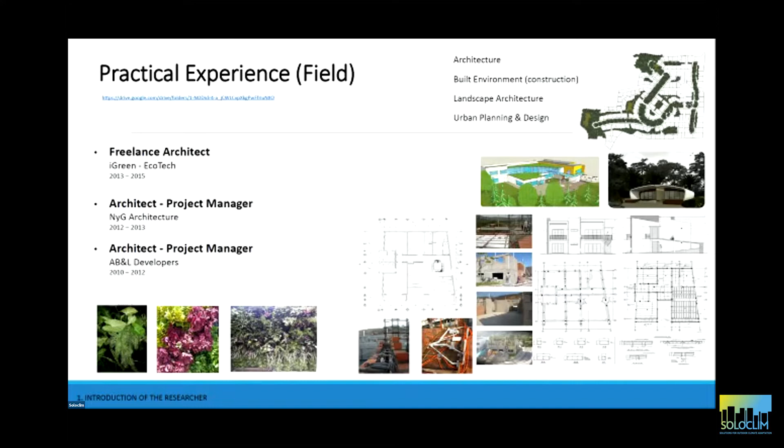So without further delay, I would like to mention the Soloclim supervisory team. For Arcadis it is Marian, Verali, and Luke. Meanwhile, for Politecnico di Milano, we have Valentina, Eugenio, and Matteo. A little bit about my background in architecture. I studied architecture as a bachelor and have some 5 years experience in the built environment and landscape architecture, but as well a good balance with the academic side. Without further ado, let's proceed with the research topic.

So, water-based solutions and urban climates. My research reviews and tests evaporative cooling principles and techniques applied to outdoor elements, spaces, and surfaces, focusing on designing innovative cooling prototypes using water to reduce peak temperatures during extreme events, in this case heat waves, in urban areas, improving the thermal comfort of citizens. And here I show a couple of images, but we will talk further about it.

Why use water? This is one of the big questions. So I can immediately tell you as a starting point some of the key advantages of using water for reducing temperature in urban areas. It can significantly reduce the air temperature. It has very low economic costs, as it's a natural process, done by nature, and it has a high thermal comfort and psychological perception.

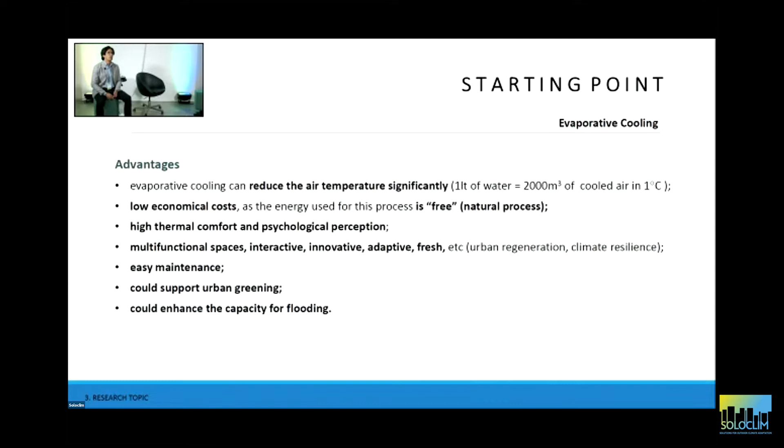But it can also support multifunctional spaces. They can become interactive, innovative, adaptive, fresh, in support of urban regeneration and climate resilience. It has easy maintenance, and it can as well support urban greening and enhance the capacity for flooding.

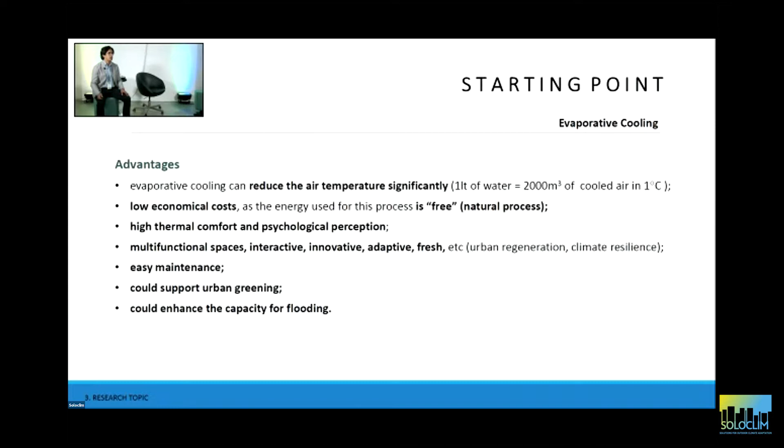It has, of course, conditions to successfully occur, related mostly to the natural environment and the microclimate, like the relative humidity, but of course as well the surface area to volume ratio. That means the smaller the particle of water, the quicker it evaporates if the climatic conditions are correct or ideal.

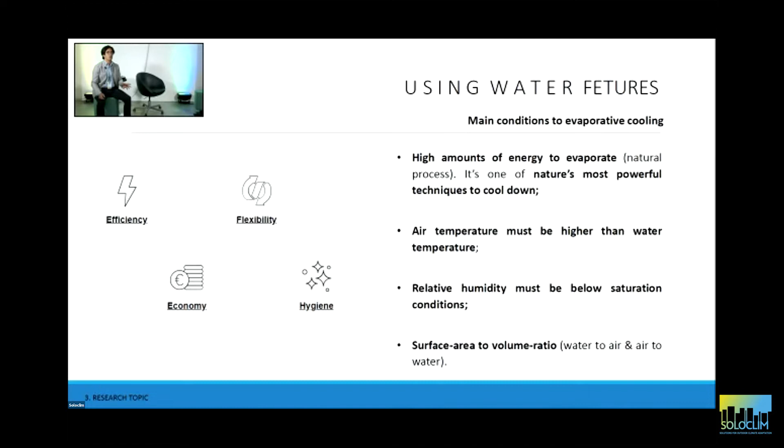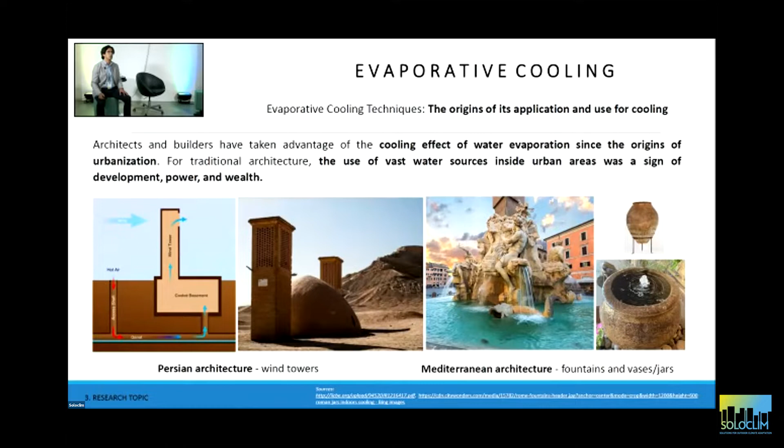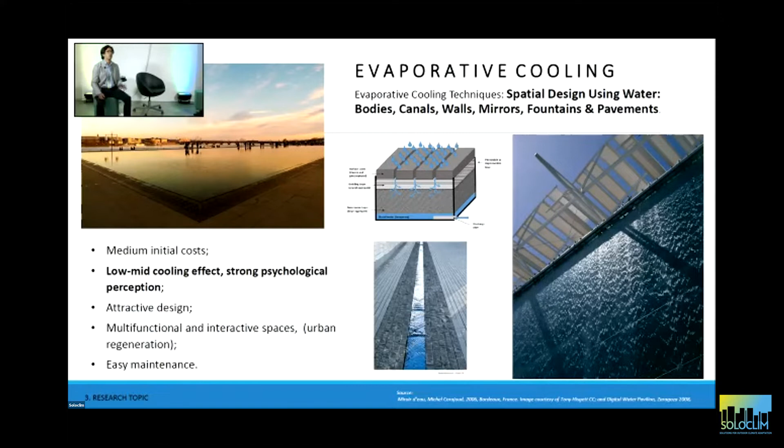So I started my research by going to the past, to the origins of the application of evaporative cooling. I studied different cultures like Persian architecture and Mediterranean architecture, and I went deep into research on what has been done in the past. Then I started working towards what has been done in the present and in the last years. I made a quick selection and categorization by cooling effects. So I present here some low and mid cooling effects with water cascades, fountains, mirrors, and so on.

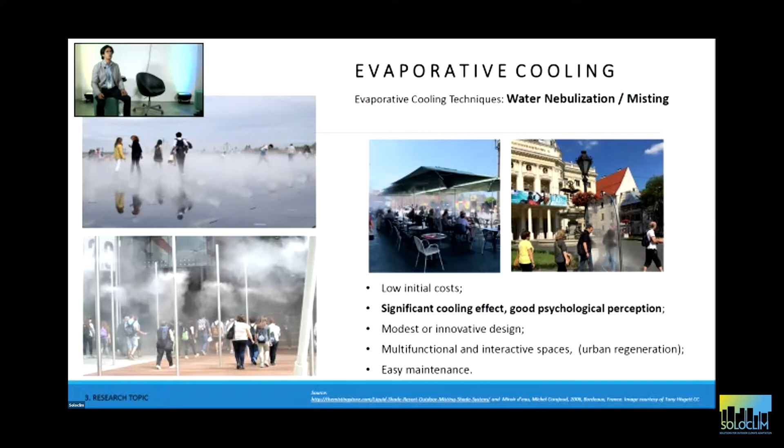Another one that has a significant cooling effect is water nebulization or misting. It's due to the area to volume ratio again. With the micronization of water into small particles, it is easier to evaporate, so this has a higher effect. When the water evaporates, it absorbs the heat in the air surrounding it.

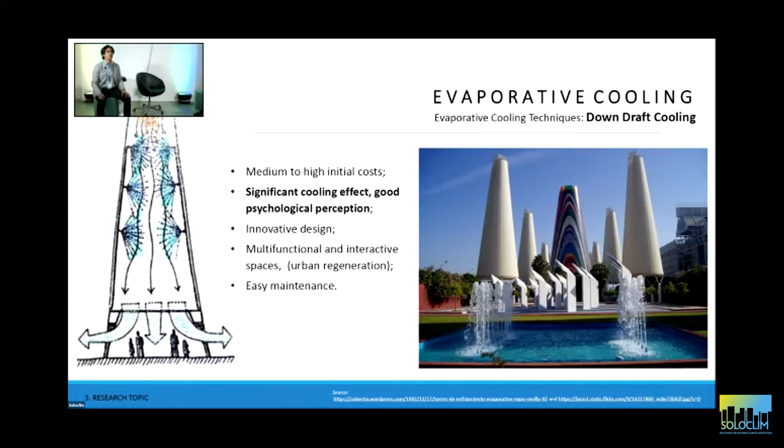An interesting technique around this one is called downdraft cooling, and it's pretty much misting on top of columns that are surrounded or confined, creating a cooling current going down below, because the effect of hot and cool air is just a natural process.

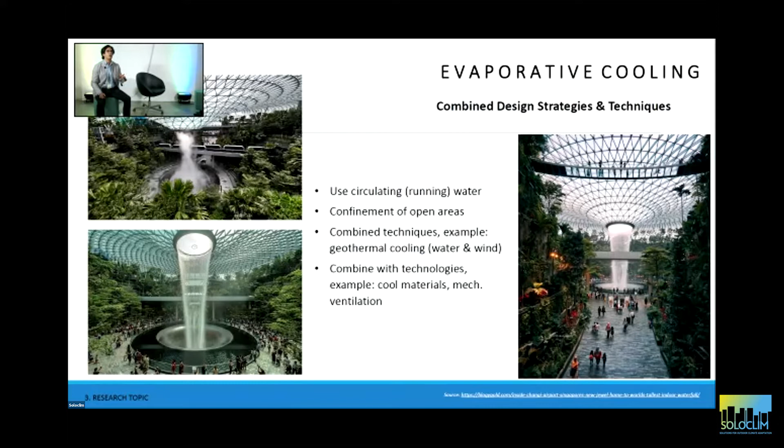And at the end as well, I put it together with combined solutions where you have different elements like nature and water, evaporation of water, and then you can have a microclimate, very confined, very strategic. But as well, it has disadvantages, and I found already for the prototyping some limitations.

So of course, if humidity is above a certain percentage, humidity saturation, then evaporation processes are reduced, and it is less comfortable for people around it. And some of the limitations for the prototypes is that it can dissipate in urban spaces, so outdoor areas. So it needs confinement. This has been a great discussion among my supervisors and my colleagues. Of course, it uses water, and we are in an area of water stress as well. So this is a topic to talk about.

Meanwhile, proliferation of harmful agents like Legionella is possible, so it needs to be filtrated in case. And of course, it needs some infrastructure change. You need to be spending some money. But let's talk about designing the prototype.

So during the studies and during all the research I've performed until now, I separated the principles that are most interesting. And I have found that, for example, heat dissipation in buildings, when the buildings are having these wind flows and it's knocking on buildings and it's going in different directions, this could be used, and I will show you later on. But geothermal is another, from the Persians as well. They used it in the past. It's very interesting how cooling air is possible over there.

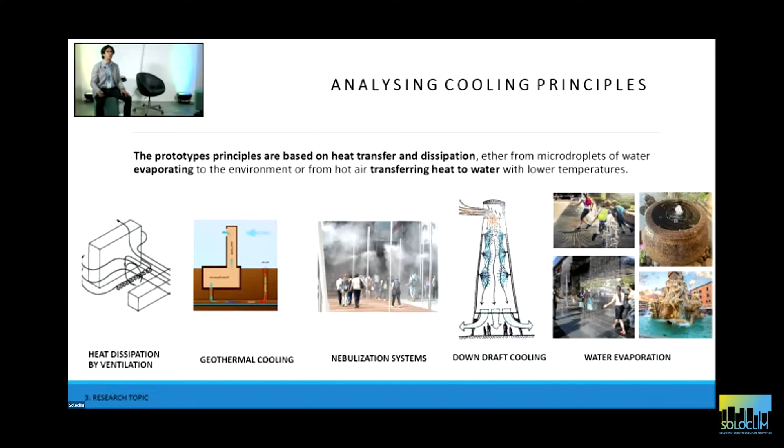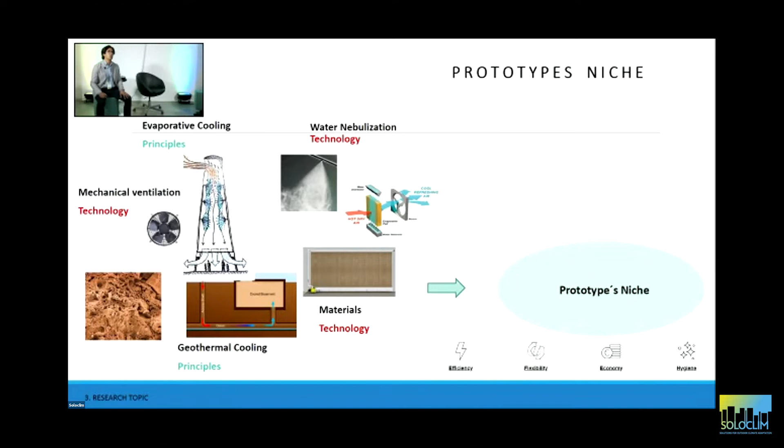Of course, nebulization, downdraft cooling we spoke of, and water evaporation, as Romans did with their fountains and with their jars, and as architects are doing now. And then we find the techniques that are just spatial planning and design by architects, and different strategies. Okay, well, let's say prototyping for the niche. I combine these principles and these techniques, I put them together with different materials, and I find a niche.

And then what I do is I have three steps. The first step is identify the hotspots, data-driven spatial analysis, I call it. The second point is prototyping the solution. And the third point is the research through design approach. This creates the analysis, comparison, and retrofitting of proposals. The first point entails finding the location.

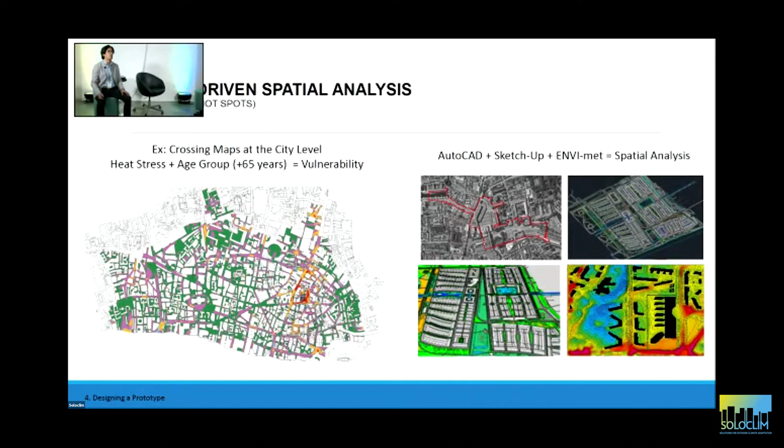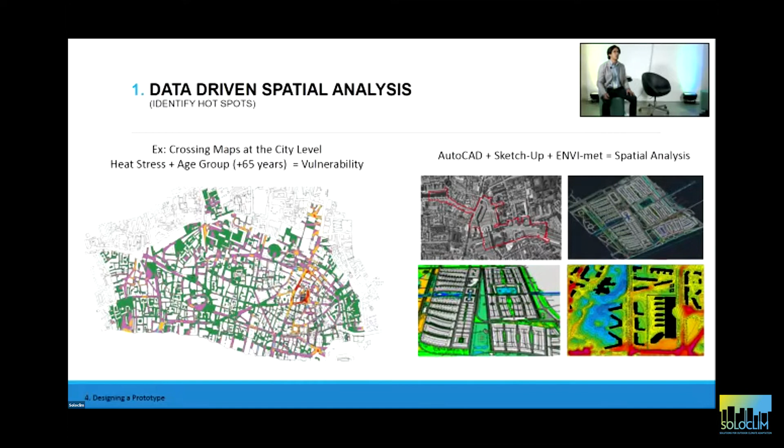For this, I have been using GIS, so mapping where the heat is, but not only the heat stress in the city. I also use age vulnerability, as people over 65 are more vulnerable. And then with different software, AutoCAD, SketchUp, ENVI-met, and now Lumion, I start doing the analysis. So it's very located. That's why I call it data-driven. Prototyping the solutions in certain areas already selected.

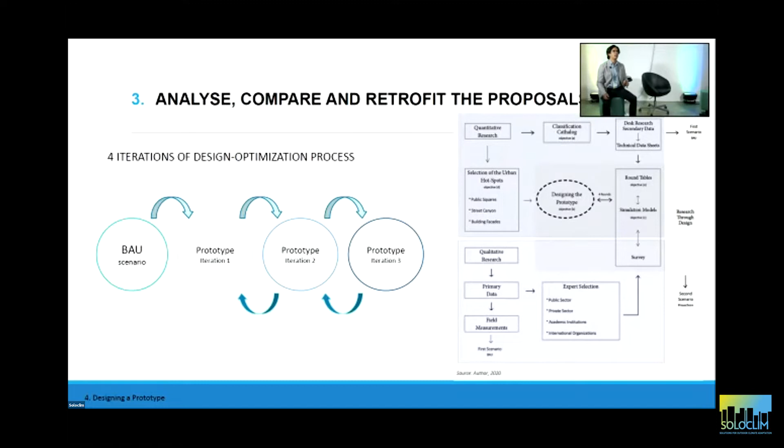And then I go through the research through design approach, entailing a qualitative and quantitative approach, where I talk to experts and retrofit the analysis. Some of the areas for designing are the response to climate change, the thermal comfort and cost, and so on. But I want to jump directly to the prototypes. I will be showing you two types of prototypes, facade and ground prototypes.

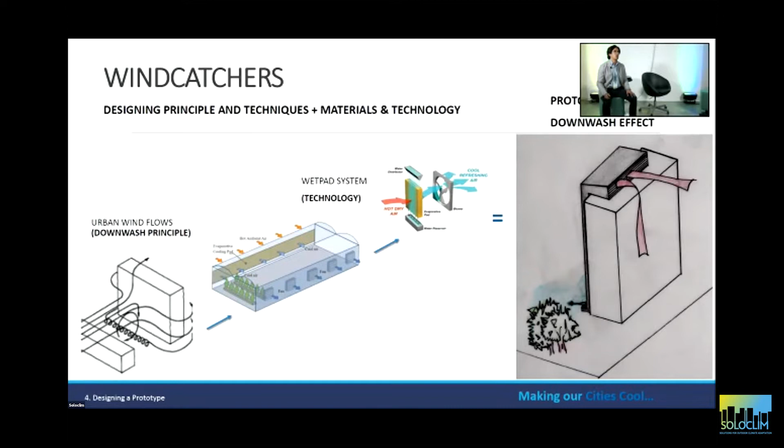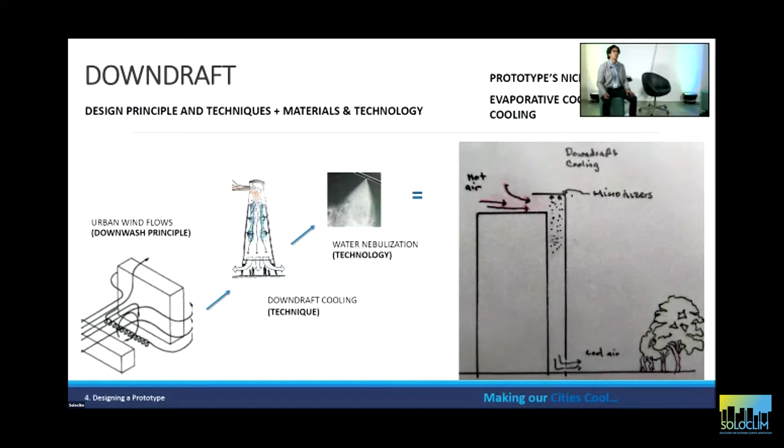The wind catchers start with the downwash principle, when buildings get this energy from the wind, together with a different material and technology, and we can have a first draft of my prototype on the sides as well. If you combine it as well with nebulization on top, then you can get the downdraft effect if you have confinement. And I would like to show my first prototype.

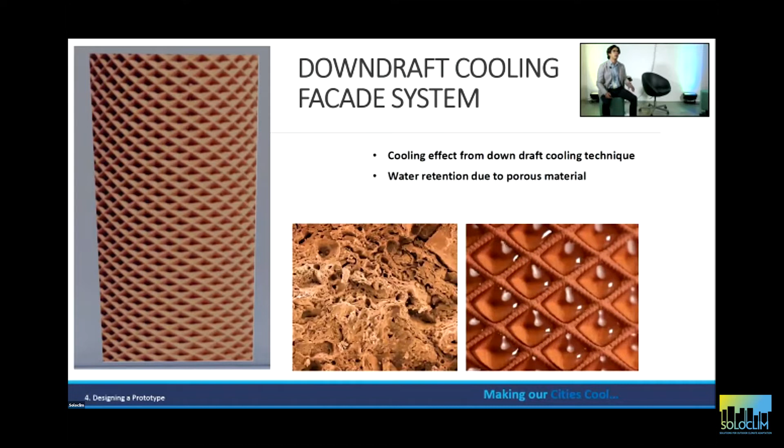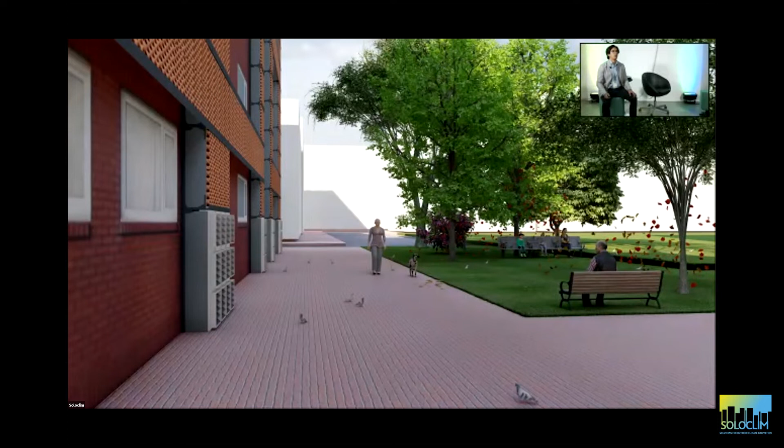This is one of the materials I'm using, very porous, this kind of baked material that can support water, it can have some cooling effect by the downdraft effect, and it's very porous. And if you put it in a render, there's a panel of 120 by 60, and it can be built as a second facade, supporting as well solar radiation for the second building, and giving some outdoor space some cooling effect. So here is where the wind is caught as well.

And here's an image of the structure and an image of the water micronizing inside as well. So this is how the panels are working, fixed and being irrigated. The second prototype that I'm going to be talking about is geothermal. And this geothermal is consistent with the Roman jars as well.

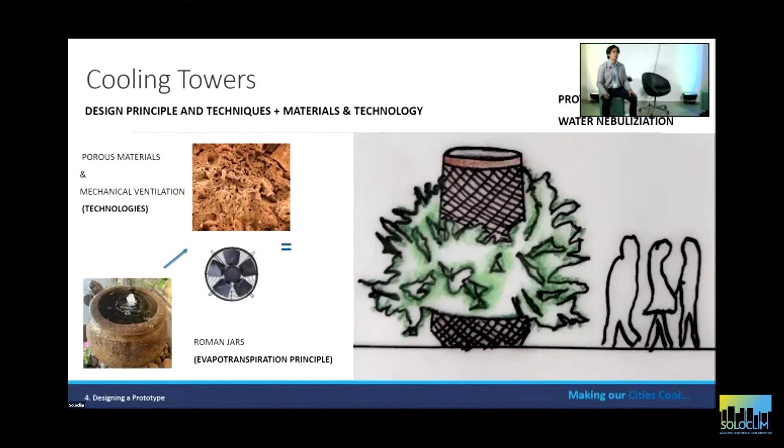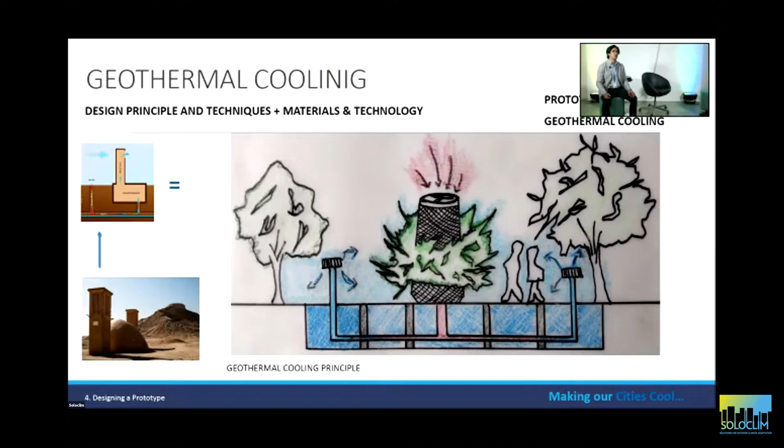Same materials and some ventilation that can be used with some geothermal, so where the air goes inside the jar by mechanical ventilation, passes through water, creates heat exchange, and is expelled in certain areas. And these are the first intentions of drawings and draft drawings of the prototype. And then I present here a

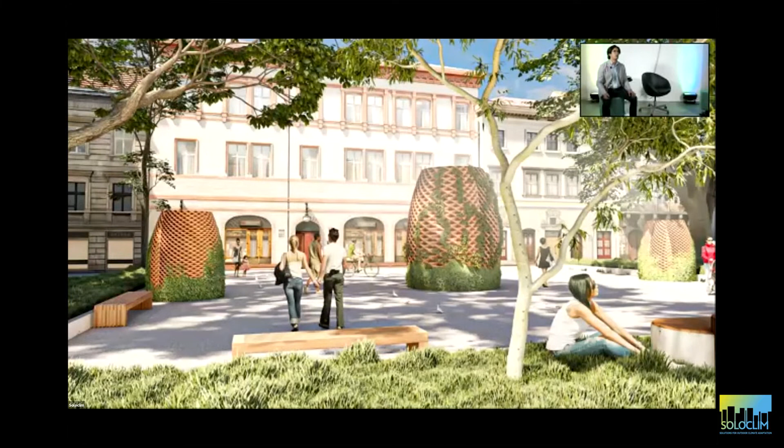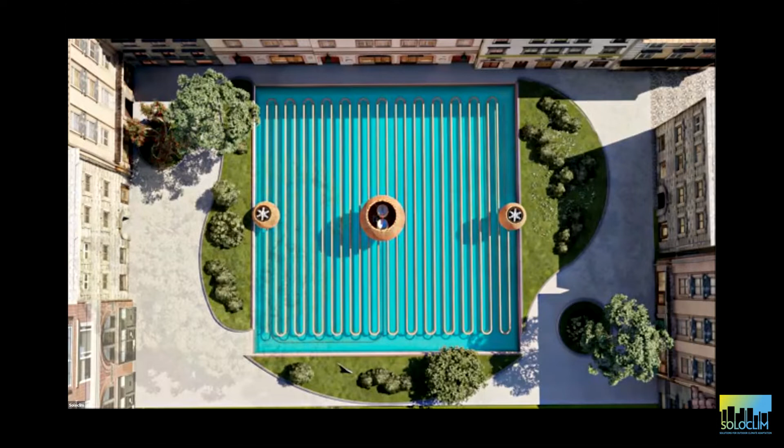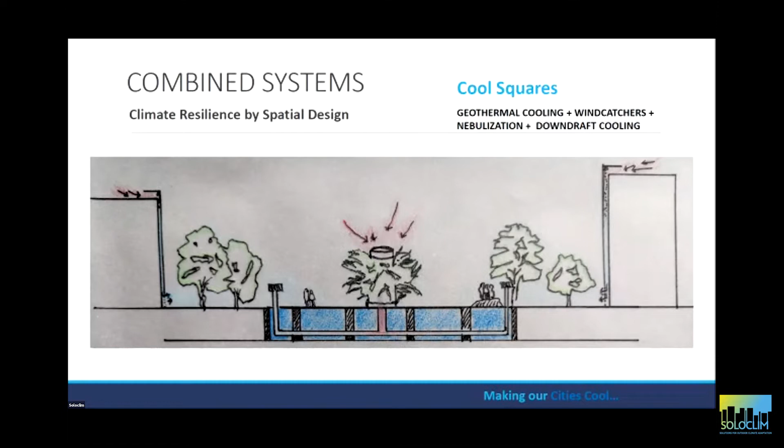render of how it could be looking, same materials, some plants growing in it, and the water is below, creating the cooling effect. This is how the water could be looking, so it supports as well the flooding capacity of the area. And as a final image, the combination of both prototypes creates what I call the cool squares, where we can have an area where it's cooled and supporting against the heat island effect phenomenon.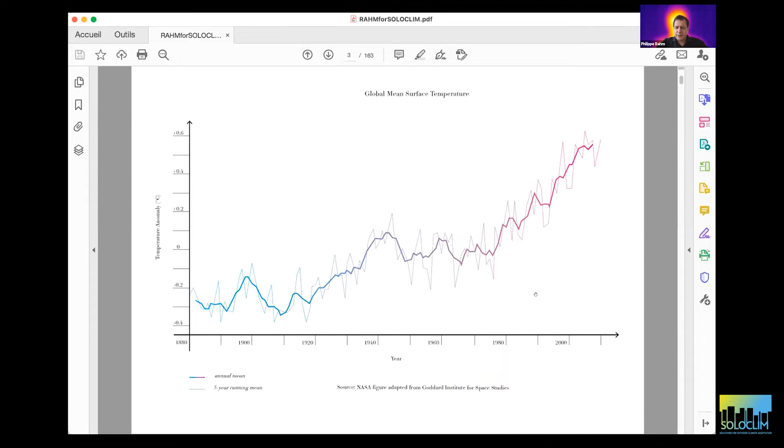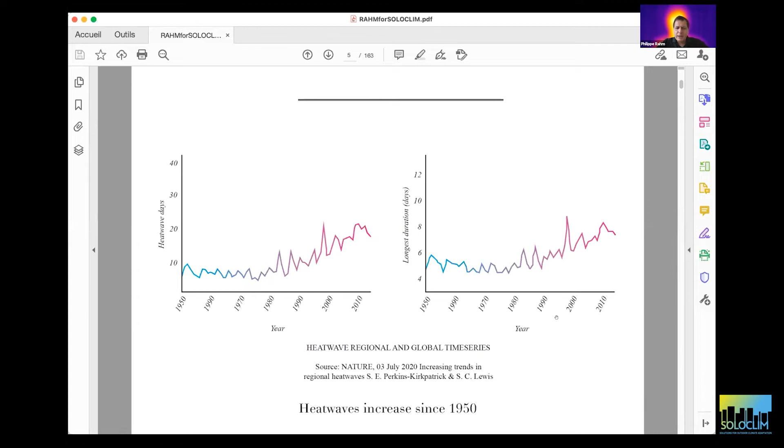So first, this is what's happening today with global warming, and this is the consequence of that. With these different scenarios, it can grow more than maybe 6 degrees. So the city will become more and more hot. We can see also here the increase of heat waves since 1950. And of course, the heat waves are linked to what happens in the city with what we call the urban heat island.

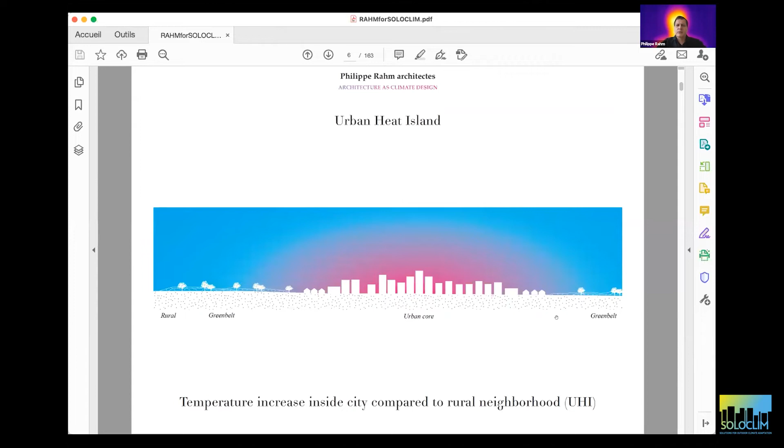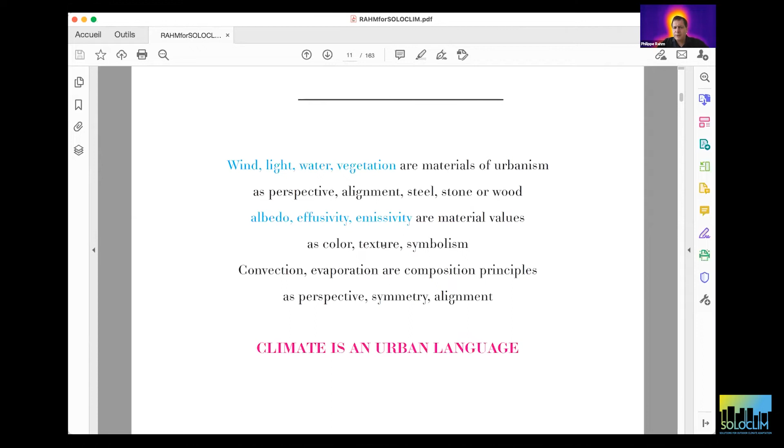And so if we want to do that, we have to use some tools, like wind, light, water, vegetation, or albedo, effusivity, emissivity, or evaporation as a principle of composition. So this is what I'm doing in my office, in my urban projects. I use these kinds of phenomena to do the design. So now I want to give some examples of that.

So the first one is a competition we won in 2019 with OMA and Laboratorio Permanente in Milan, Italy. This is about two sites. One is 44 hectares, called Farini, and another is 15 hectares. And we have to do a new part of the city because it was all abandoned land from the railway company, and so it's empty today. And so we have to think about the future of that.

And when you are designing a city, you think about the public space and the private space. So the public space can be a plaza, it can be the street or boulevard, or it can be a park. And so here we say, okay, the public space should have a kind of environmental issue.

It should respond to something. And so we decide, for Farini, to create a cooling effect for the city and for the people living there. And for San Cristoforo, we decide to do a cleaning effect for the underground water. So it was like to clean the air for Farini and to clean the water for San Cristoforo.

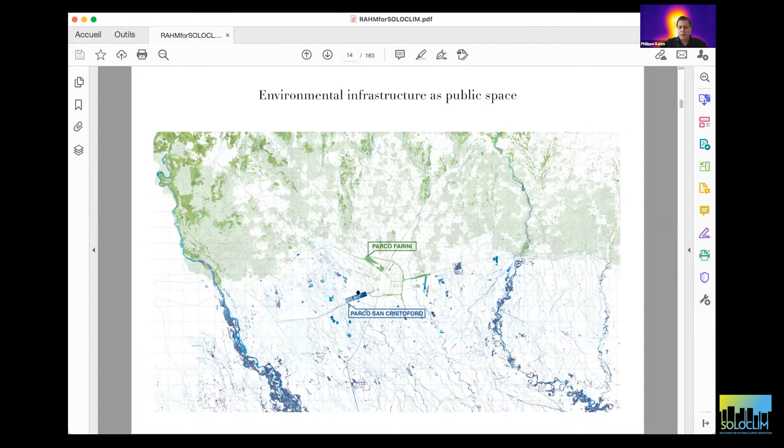And this becomes a new public space for the city. And so we call that the Limpidarium. So it's a new type of, you know, it's no more a park or no more a square, it's something that cleans something, like the Limpidarium d'Aria, Limpidarium d'Acqua. And so first, when we did the project in 2019, it was super hot in 2018 in Milan. And so we say, okay, we have to do something for cooling the city. So what we can do? And so we create this Limpidarium d'Aria.

And the way to work with the Limpidarium d'Aria is to create a kind of filter, like a land, public space that can cool the air and can recreate by convection, by creating a cold pole, like a thermodynamic polarity. You have something cold and something warm somewhere, so it creates a wind. And so we want to create a very cold area that can move the air to the new buildings, and create a kind of cold wind for cooling the new district.

So for doing that, we are first placing some trees to create some shadow. So the ground will be colder because there is no radiation from the sun. And then we propose evaporation. We propose to have a fountain and a mist of water to cool the air by the change of phase from liquid to gas. We remove some degrees of the temperature of the air.

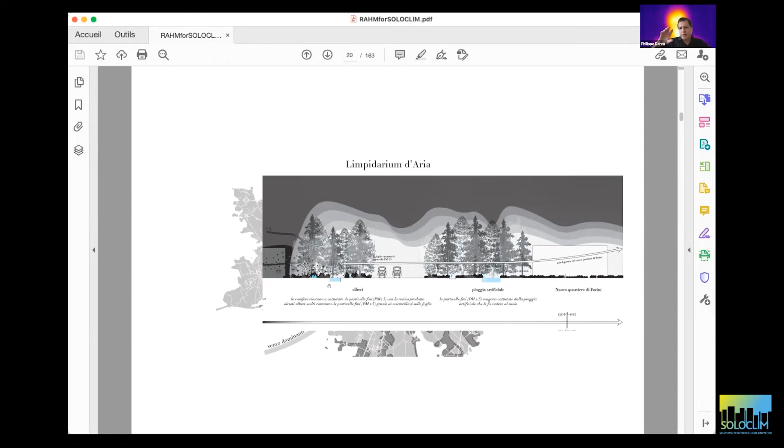And then we also work on the cleaning of the air. We say, okay, we have to cool the air, but the air is also polluted with PM 2.5. So we have to do something about that. And so we propose to create some artificial rain, because the artificial rain traps the PM 2.5 that falls down and then goes in the water of the ground. And we also choose some specific trees, like pine trees, that can catch a little the PM 2.5. So the Limpidarium becomes also a place for cleaning the air. So this is a site in Milan.

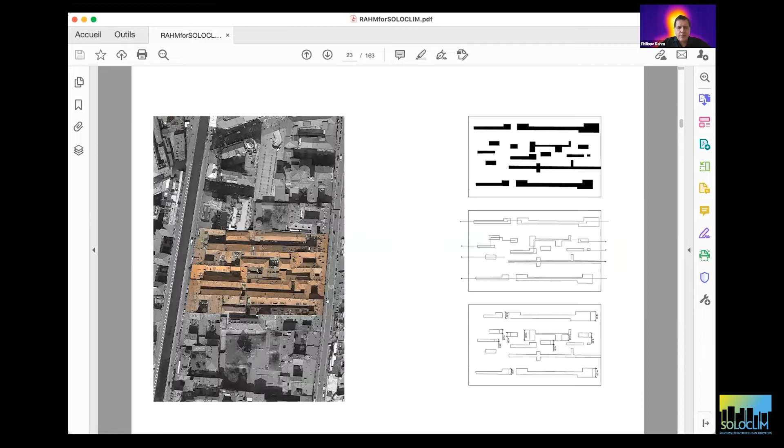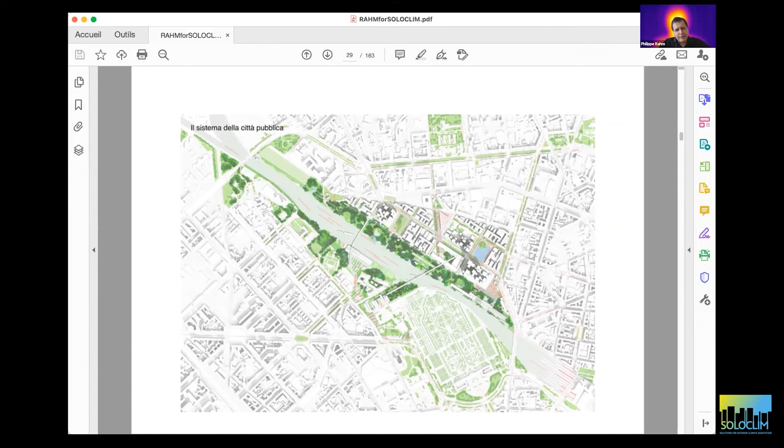And so we do some models for placing the buildings in order to have the new wind that we are creating with the Limpidarium go inside the new district. So we place carefully the buildings in order to let the wind go through, and then we choose different types of material. We work on the albedo, and we work on the different locations. So at the end we have this new district with this Limpidarium, the wind is coming here, and the new district is at the back of that.

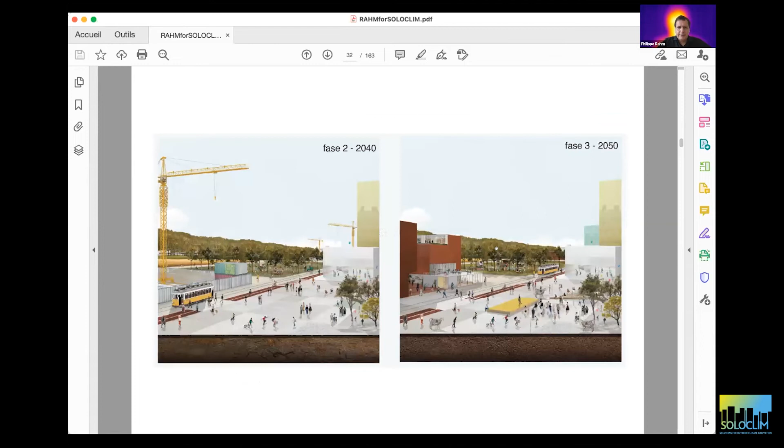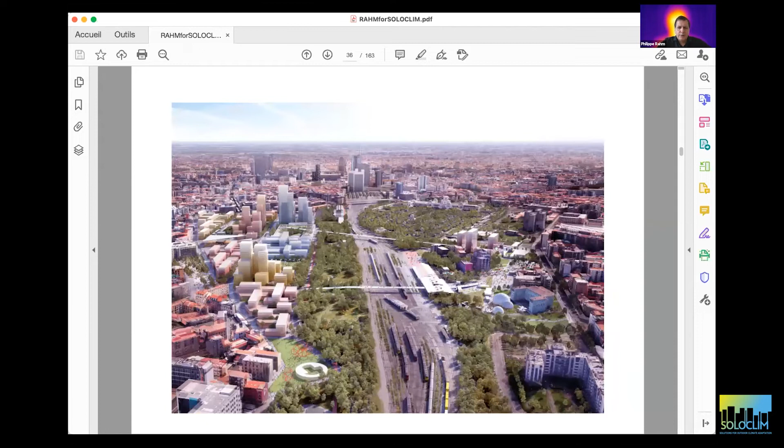So the project is made for 50 years for the development of that. So we can see at the end some images of the new district in Milan in the future.

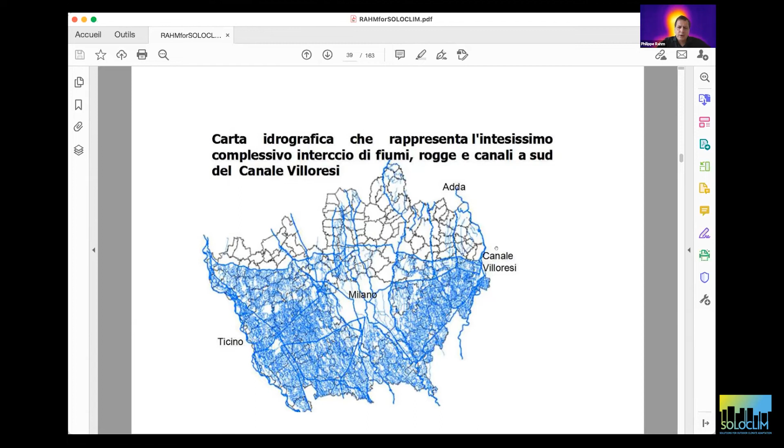And then for the second Limpidarium, the one of Acqua, we choose to clean the underground water by phytoremediation, and to create a kind of public open swimming pool. So it's also to create a public space that can address this kind of environmental issue.

Now I would present another project. This is a project, a competition we won with Catherine Mosbach and Ricky Liu in 2011. It was realized and opened last December. It's a 70-hectare park on the site of the old airport. We can see the site before the construction and at the beginning of the construction.

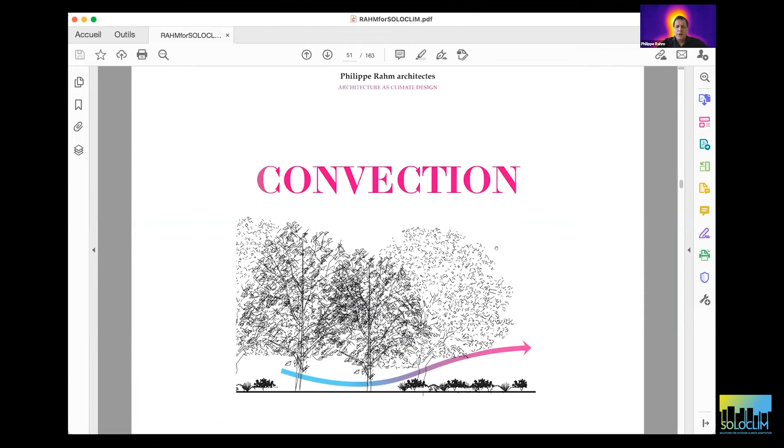The master plan is based on heat, humidity, and pollution. So we work with layers about that, and we create different layers that overlap and create a kind of master plan. So first we work on convection. We analyze the wind: there is a cooling wind coming from the north, a wind lower than 32 degrees Celsius that can cool the body. And we analyze where it would be more windy, which means it will be more comfortable.

And we reinforce this cooling effect of the wind by placing trees with high canopy that can double the cooling effect: cooling by convection, and cooling by radiation by creating shadow. And this is how we design the master plan. So it means we analyze the climate first, then from that we design the form, and then from that we place the function. So it's like function follows form follows climate, in this way of doing things.

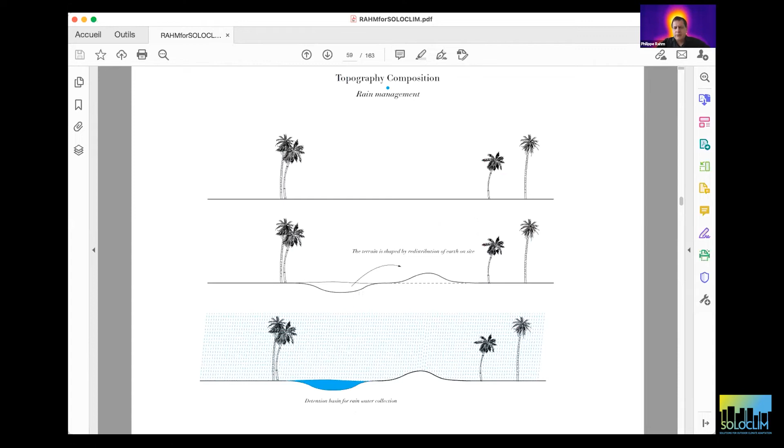So this is a view of the park today. We also work on the second layer, about water, by managing the rain and also the flood question, which is really important, and we can see the park at the flood moment. And we have also worked on cooling by evaporation. I will show that. And then pollution is the third layer.

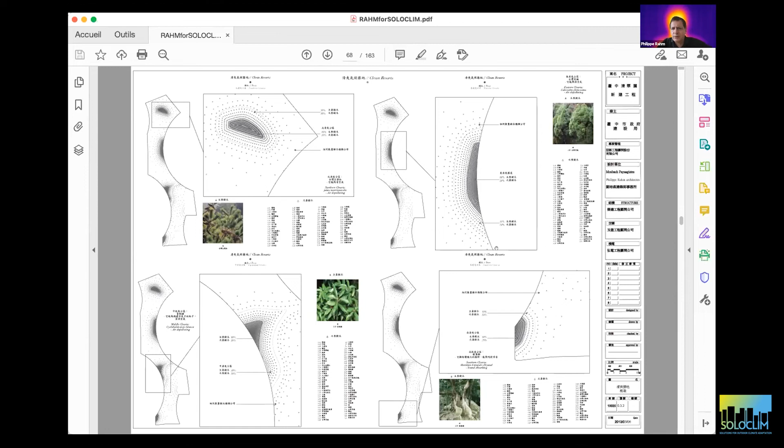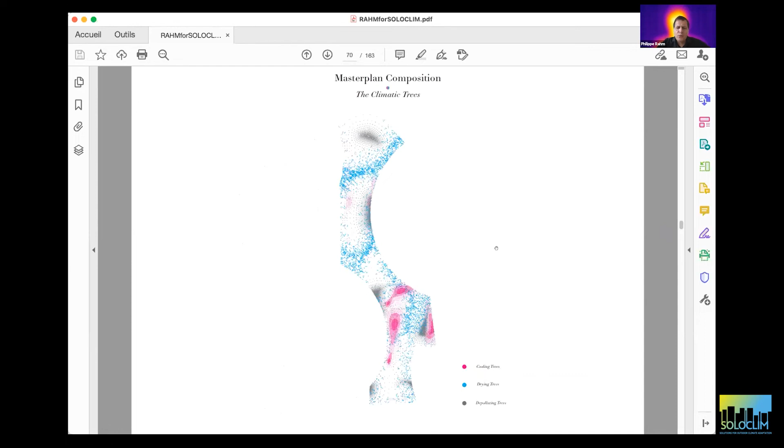We analyze where there is more or less pollution, and then we place a lot of trees absorbing the pollution. And we decided to have all the children's activities in this clean area inside the park. So in all these three layers, the choice of the trees is also related to the task of cooling, drying or cleaning the air. And all these three layers together create the master plan. So it's really to create an urban design master plan by using climate. And of course it creates microclimates, because it can be warm, humid, polluted, or cool, dry, and so on.

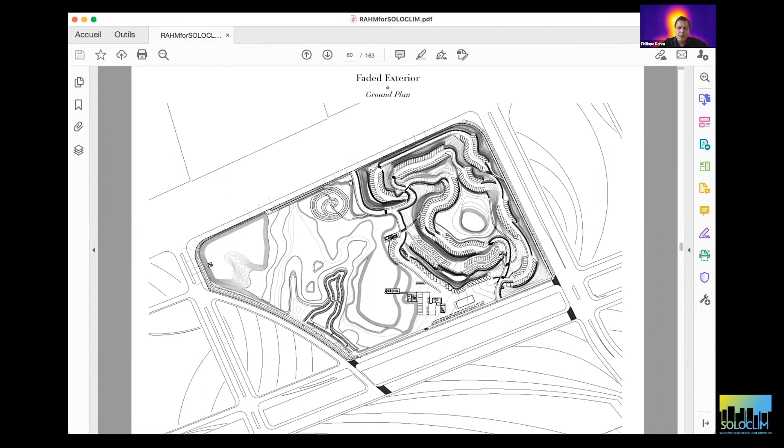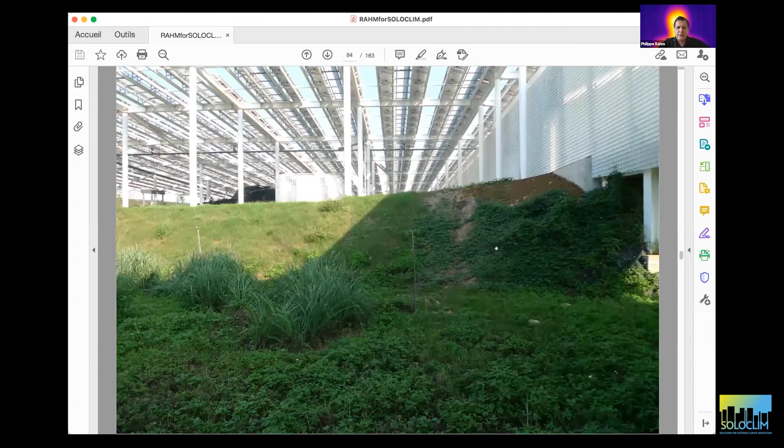So then from that, I just want to show very quickly that we have 10,000 square meters of photovoltaic panels that are producing all the electricity and also creating a more shaded landscape. We can see here some images of that kind of moderated light.

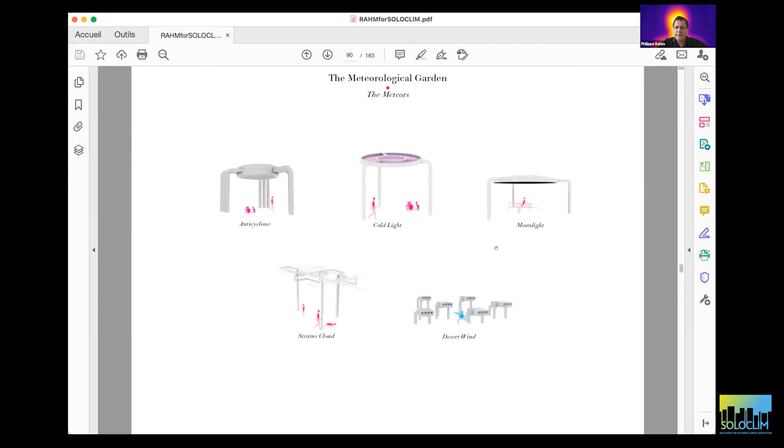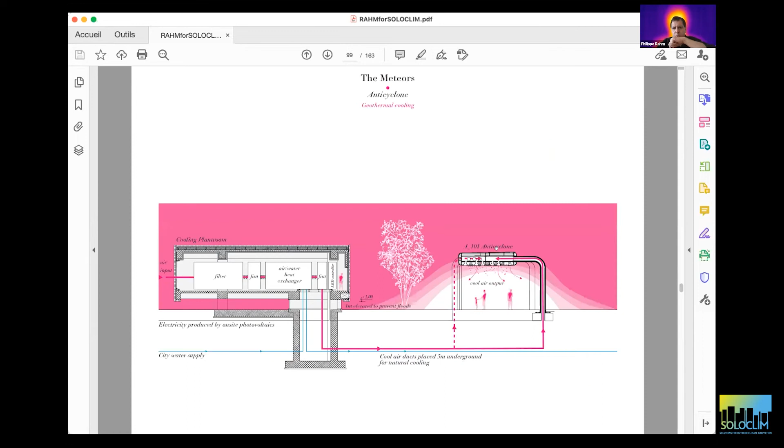And then the meteorological garden is about climatic devices. We can cool by planting trees, but we can also cool by blowing cold air, by creating a filter, or by evaporation. So we have different types of cooling effect, and this is what we can see here. The first is geothermal cooling, by taking the air underground, like Palladio did. And we create these sinks that blow cold air, like blowing on the skin to cool the skin.

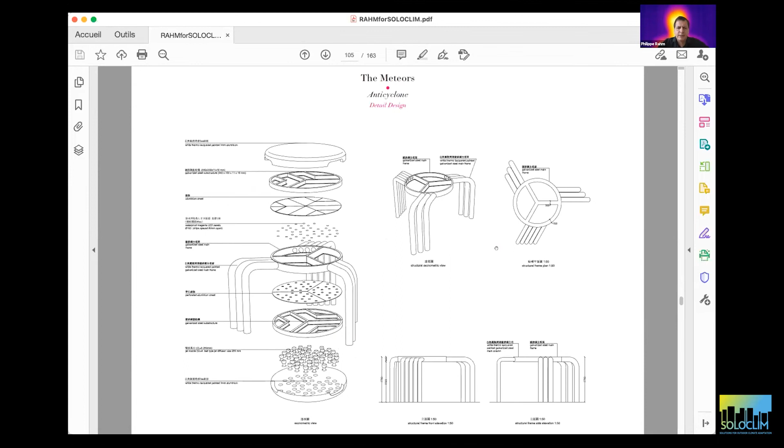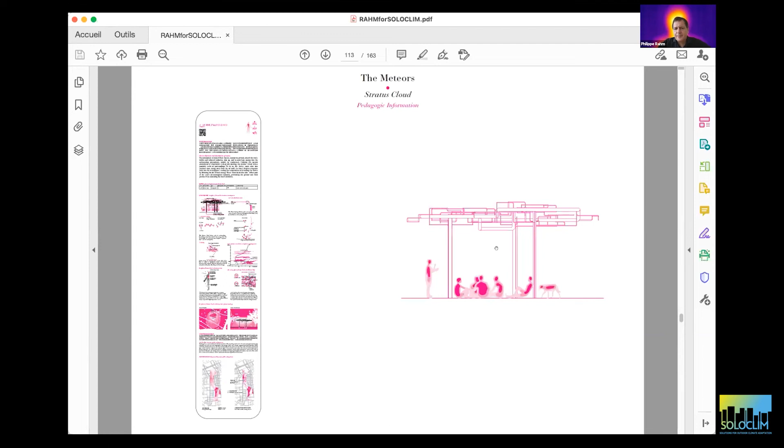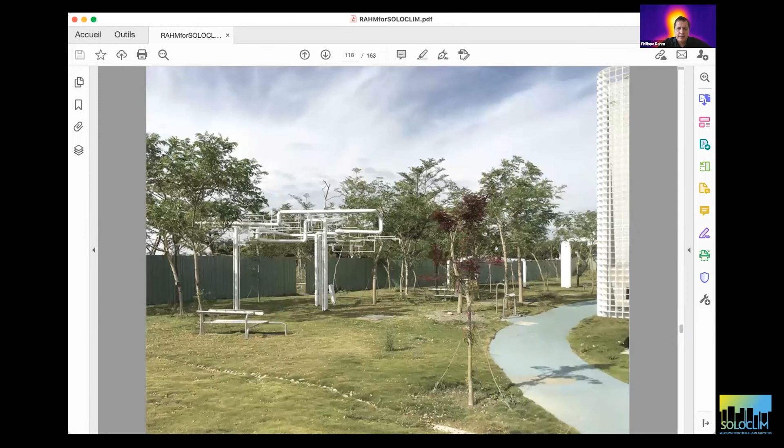With Transsolar, we made all the models to calculate the quantity of air and the speed of the air to have an effect there. And then we have these cooling objects inside the park. Then this is cooling by evaporation. We call it the stratus cloud, created by a mist like a cloud, which creates a cooling effect inside the park. We can see it here in action.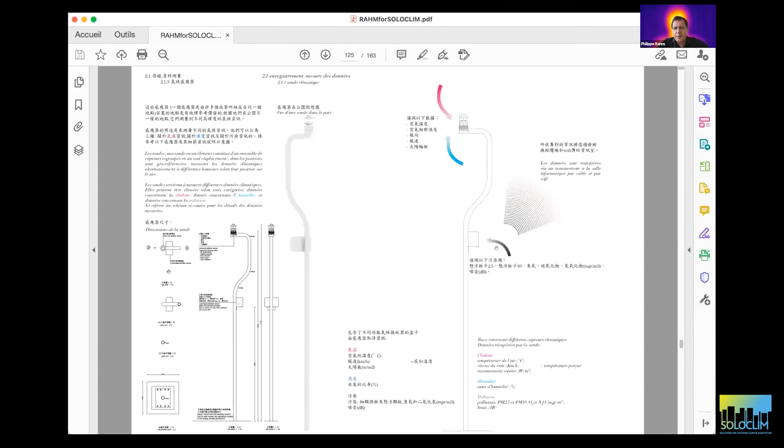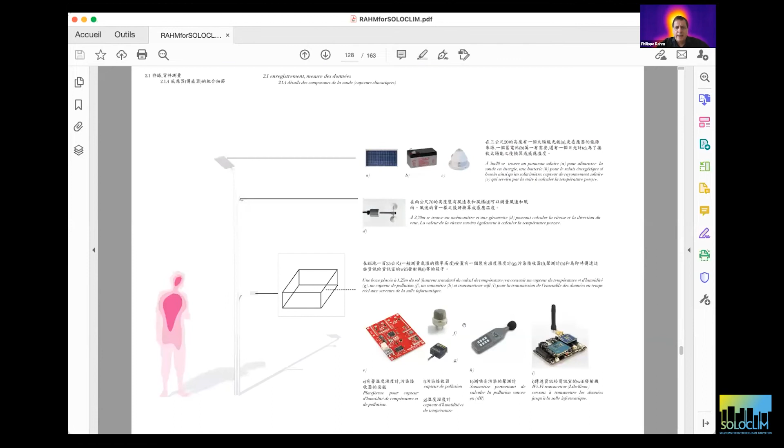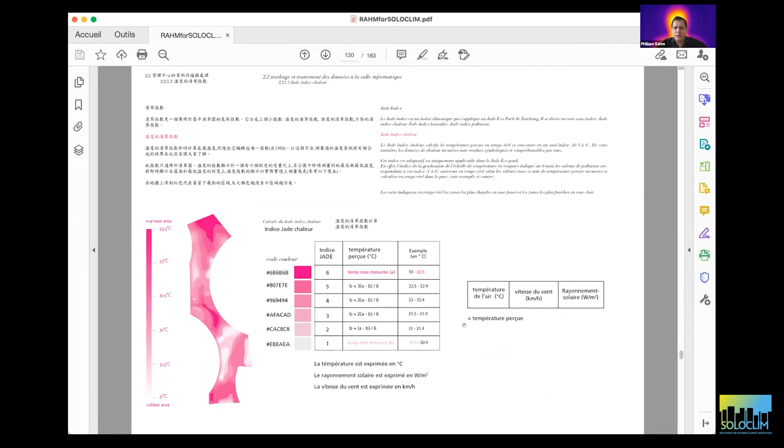And then everything is monitored in the park. We have a sensor every 50 meters, so we can make a real meteorological map. We can see here the sensor measuring humidity, temperature, noise, and pollution. And on the smartphone application you can see where it's less polluted, less humid, or colder, and so you can decide your promenade based on that. So there is this meteorology of the park here.

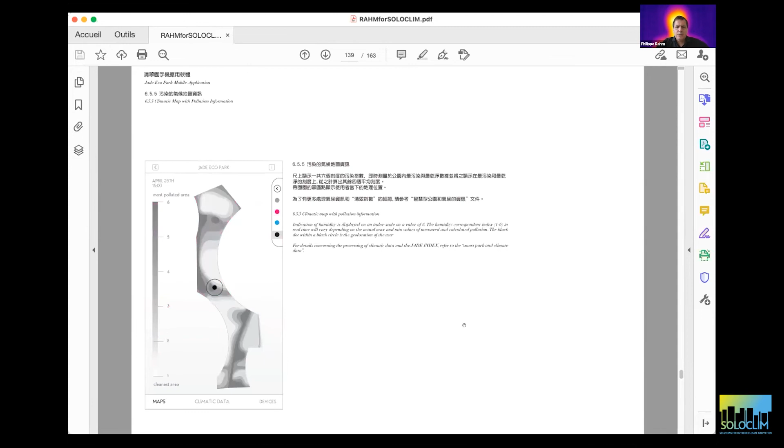Now I want to present another project we made with an office in München in Germany called Bauplan. It was a competition about the development of the city of Munich in Germany. It's a 700 hectare development, and we got a prize for this project.

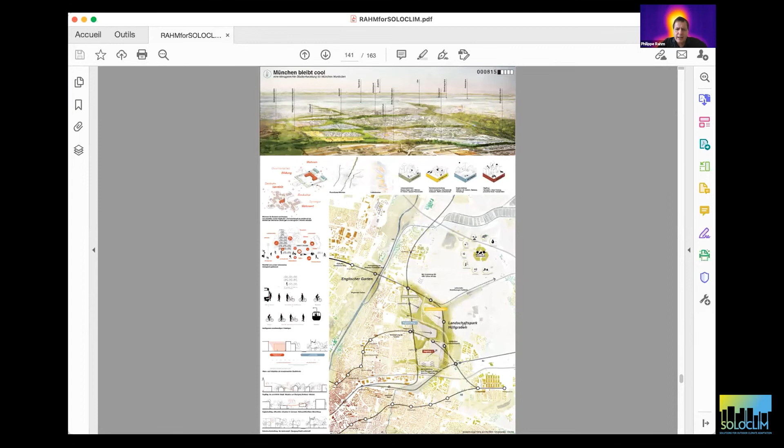So the idea is to look at all the small villages around Munich and to densify these villages, and to keep in between the villages space for the wind, space for the flood, space for the animals. This is what we can see in green here. This is space that is creating a kind of ecological background there.

And then from that, we also decided to ask, okay, what is the plaza or the park? We say, okay, we should think about a cool plaza and a warm plaza. The warm plaza will be very good for the winter. The cool plaza will be good for the summer.

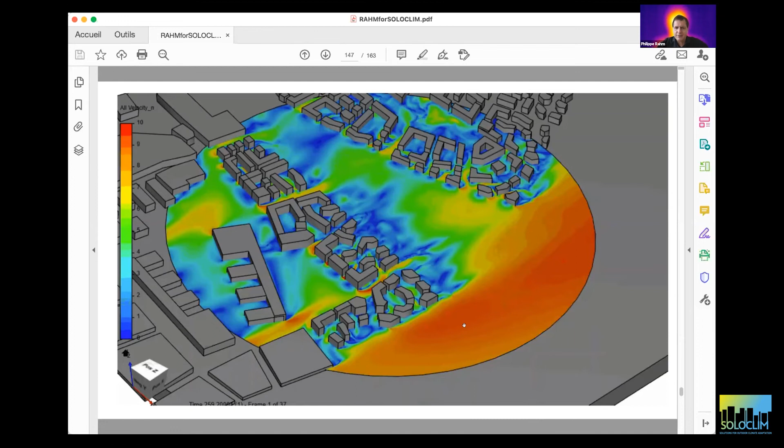So we can think about the public space, the urban space, not in terms of social use from the beginning, but more in terms of climate use that will create a social use. Because I think during the postmodern period from 1950, we forgot this kind of reality of the space. We forgot the climatic interest of the space. We just think in terms of commercial issues, social issues, but without material background. So this is what we are doing by proposing the Kaltplatz or the Warmplatz, as they say in German.

And then the last project to finish, it's a study we have ongoing in Basra in Iraq. This is for the old petrol oil port in Basra, and it was here on the river. The port is going somewhere else, so this will come back to the city and become a new district open for the city. We can see it's almost 2 kilometers.

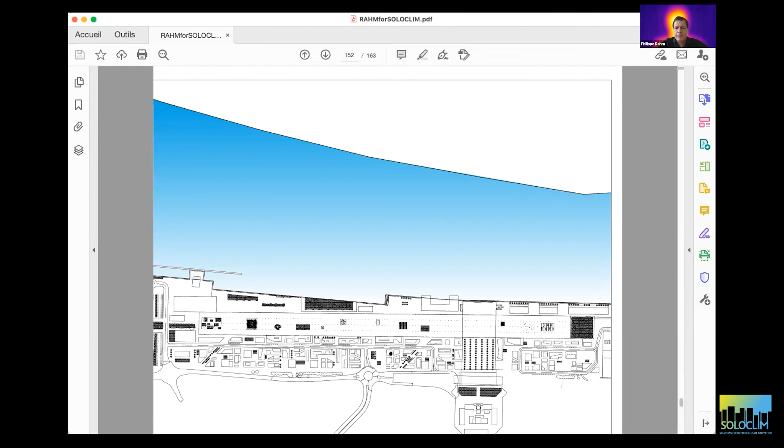We propose to do a master plan with the river, and to create a large shadow. We call that 1 kilometer of shadow, which becomes like a large public space. And then at the back of the public space, we have small housing, small streets, more like the old Arabic cities, with some skyscrapers that are part of this space. And here we can see this is the 1 kilometer of shadow.

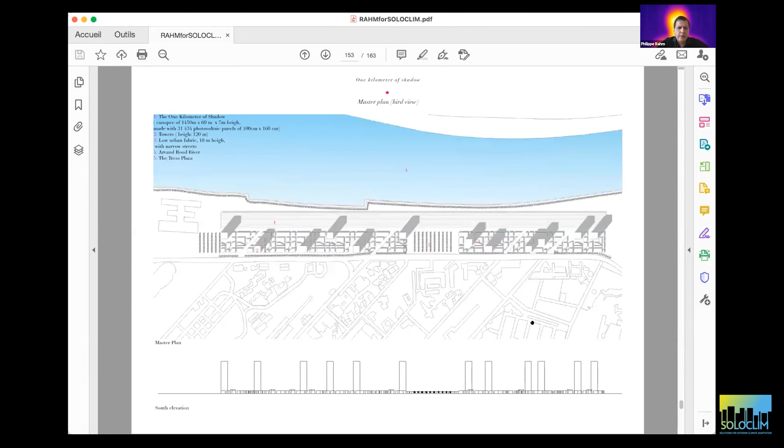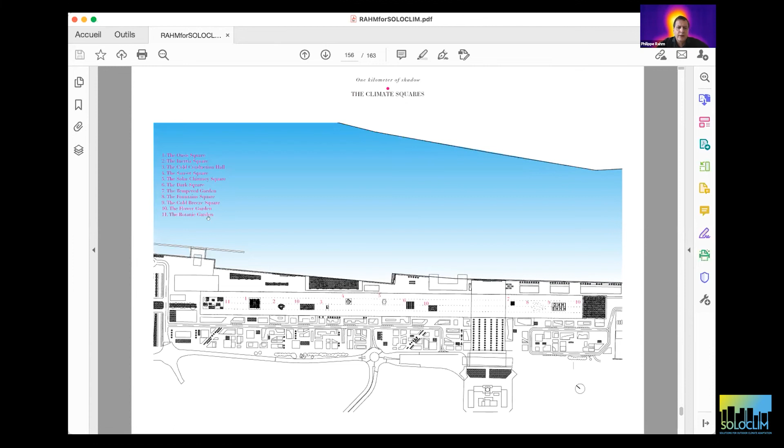And under the 1 kilometer of shadow, we propose to have different devices, different types of attractions and phenomena. We have the oasis square, the inertia square, the cold conduction hall, the sunset square, the solar chimney square, the dark square, the tempered garden, the fountain square, the cold breeze square. These are all ways of cooling by different options.

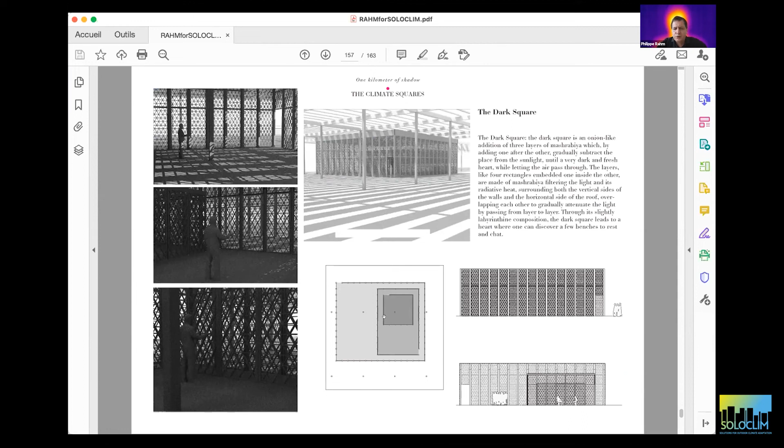For example, this is cooling by creating more and more filters, so you have a lot of light and then less light, so you can find a kind of refuge for escaping from the heat coming from the sun. This is a kind of inertia square, so it takes the coolness of the night and gives it back during the day.

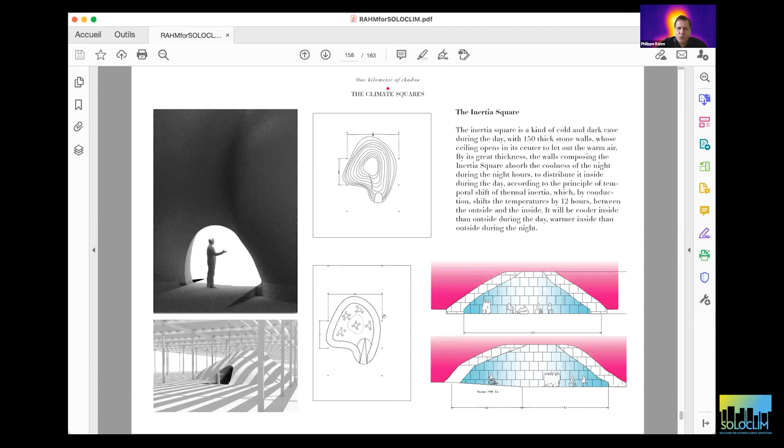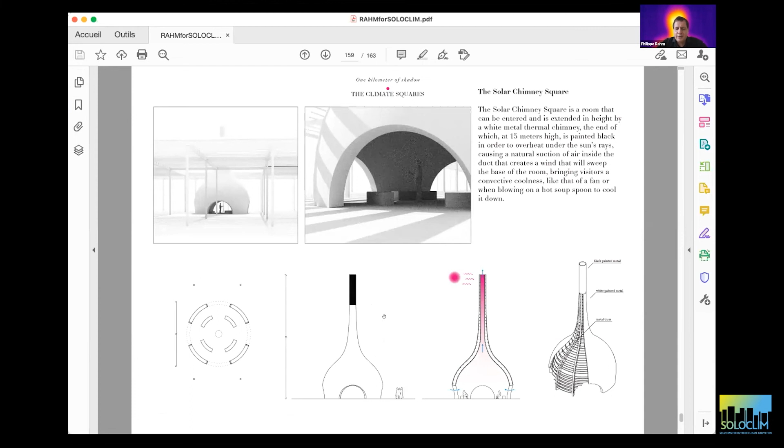Here, this is a solar chimney, so it becomes very hot at the top, and it creates a wind by convection, so it can create a kind of natural fan just by using the solar heat. This is just a garden, and there is also some cooling by evaporation there.

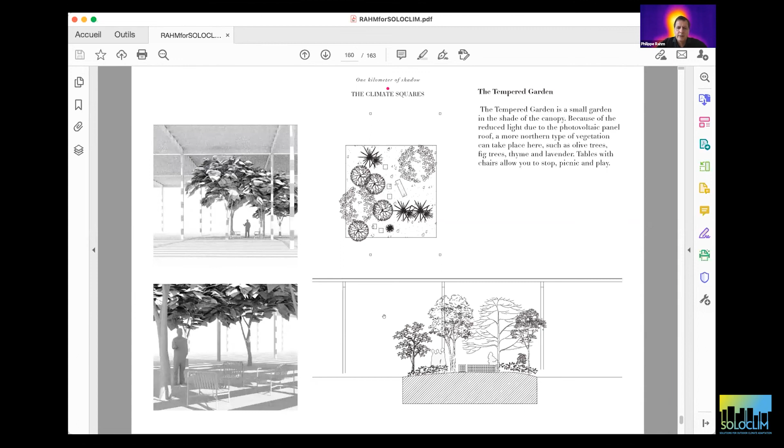If you want to know more, there is this French book about the project in Taiwan, Le Jardin Météorologique.